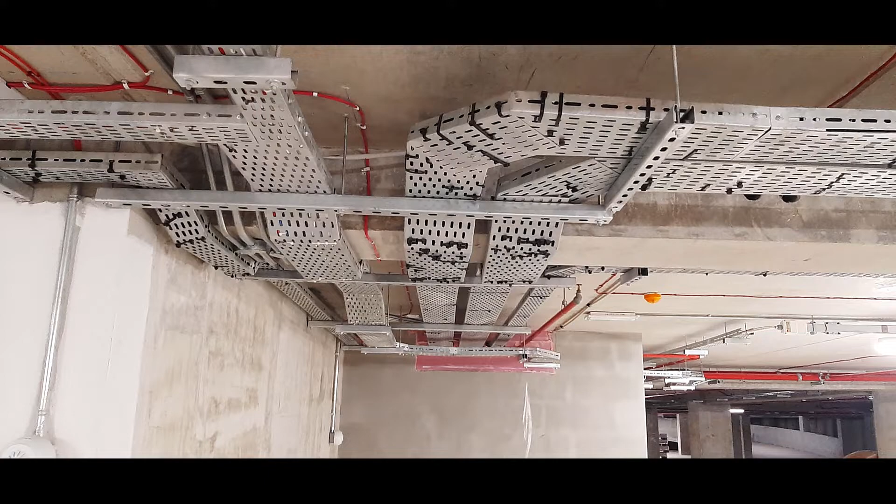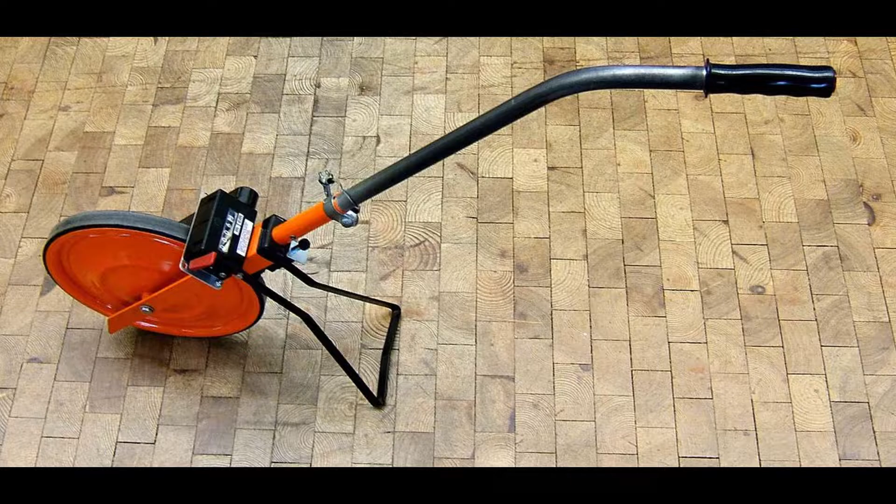Hello everyone, our work today is to measure cable tray here in a car park basement. There are many ways to measure this cable tray with different types of tools. We have measuring tape, measuring wheel, laser, and the long tape. Each of these tools is good in measuring, but it will depend on the thing that you are measuring.

For me, I'm using measuring tape and the measuring wheel, which are the only ones available on our site. Even if you have just a measuring tape, I think measuring tape will do. The most important thing is you manage to measure on site and you measure it correctly.

Another thing to consider on measuring on site is the offset. You can see in the picture that this is the offset, and sometimes we measure only in the drawings, and we cannot see in the drawings the offsets. That's why we have to consider the offset also.

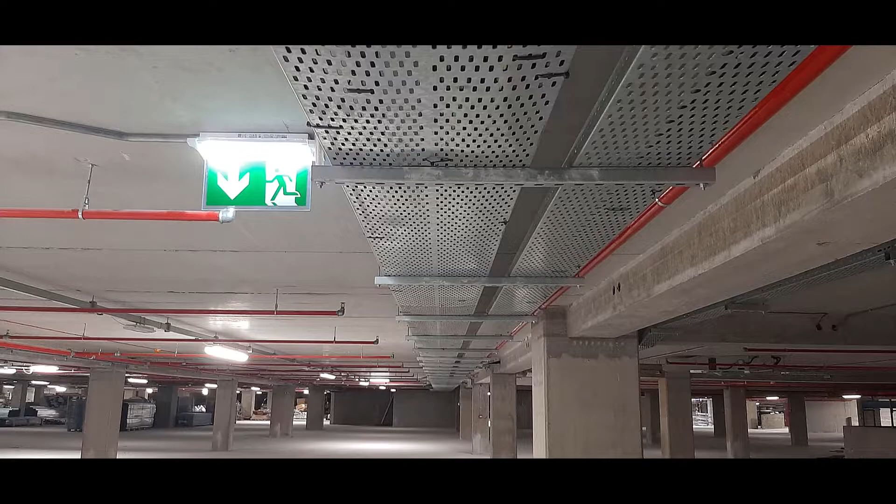About accuracy in measuring on site, we don't need to perfectly measure to 1 millimeter or something like that. At least, for me, I consider not more than 10 centimeters longer, and as long as you are not lesser than the actual measurement, especially when we are claiming it to our client, we have to put a little bit extra on it so we can earn.

But sometimes the client is very strict in dealing with the measurement. It should be what's on site, that's what you have to claim. That's why in measuring, if you are just measuring without the client or the one who is with you, you can put more extra on it.

But if there is a client, we have to be more accurate on it. If there's no one with you, you can put more extra, and if they complain or realize that, then you have to go again to measure on site. Most of the time I think they know that you are putting extra, and I think they're going to consider it a little bit, as long as it's not too much for them. So there is a consideration at least.

Now I'm done measuring on site together with the markings and highlightings on the drawing, and now I'm going to transfer it to the program I have.

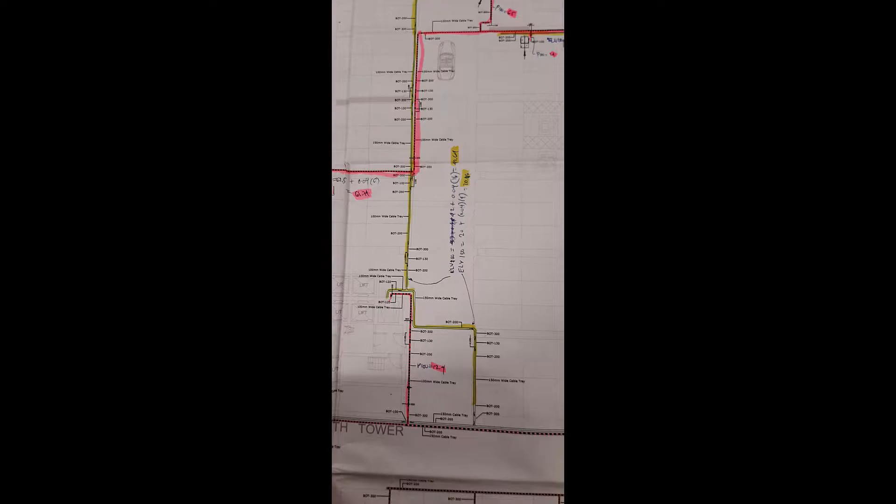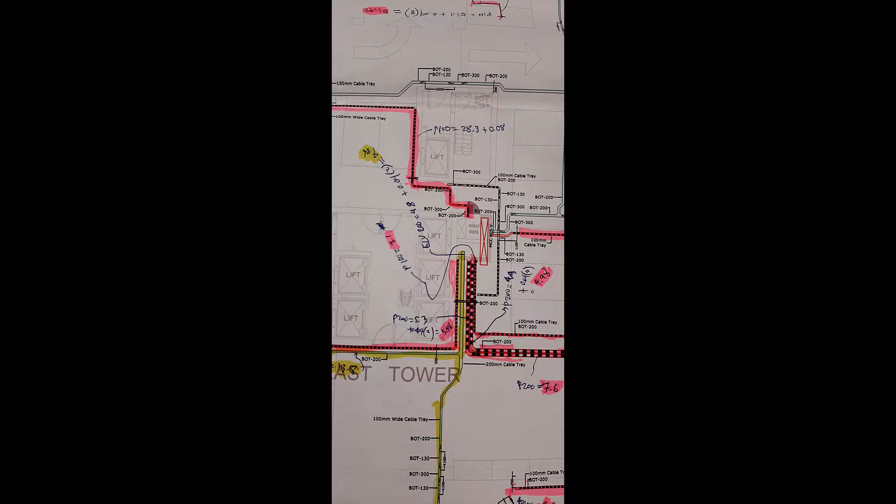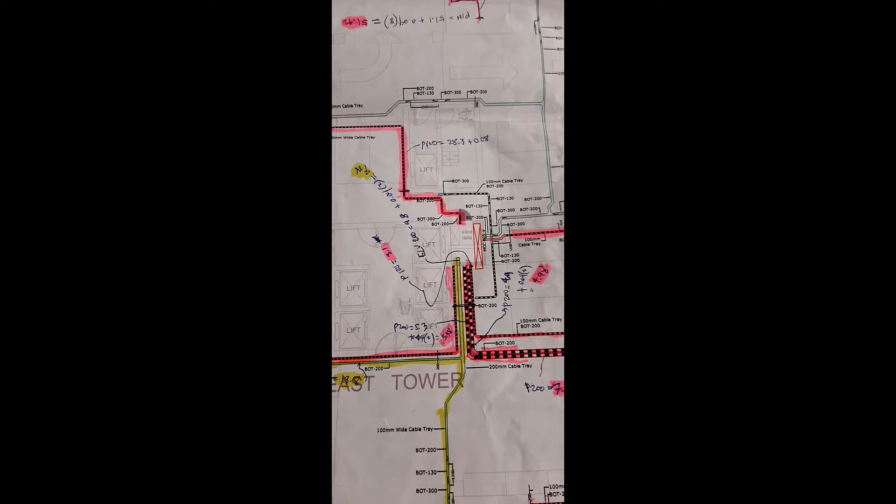Before, when I wasn't using this program, I was just directly going to Excel to input the measurements. But after I learned this program, I don't like to use Excel anymore, except for the bill of quantities to input the quantities. Now I'm going to show you the program and explain to you why I really like it.

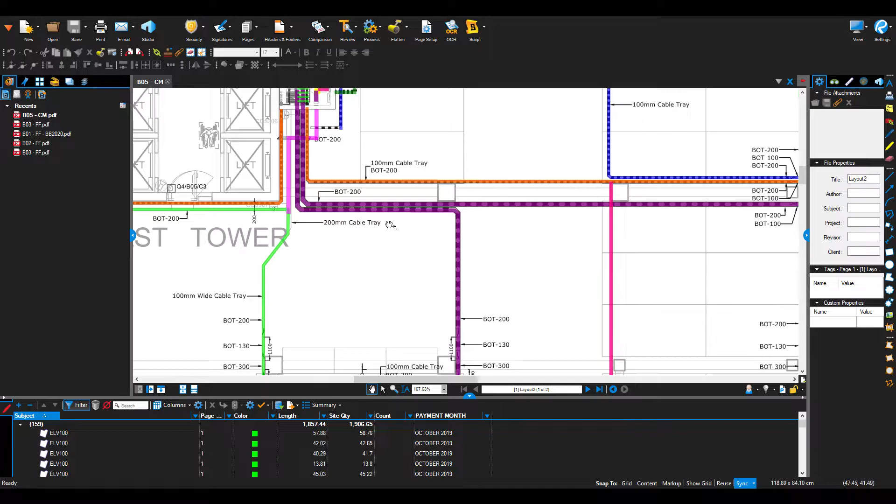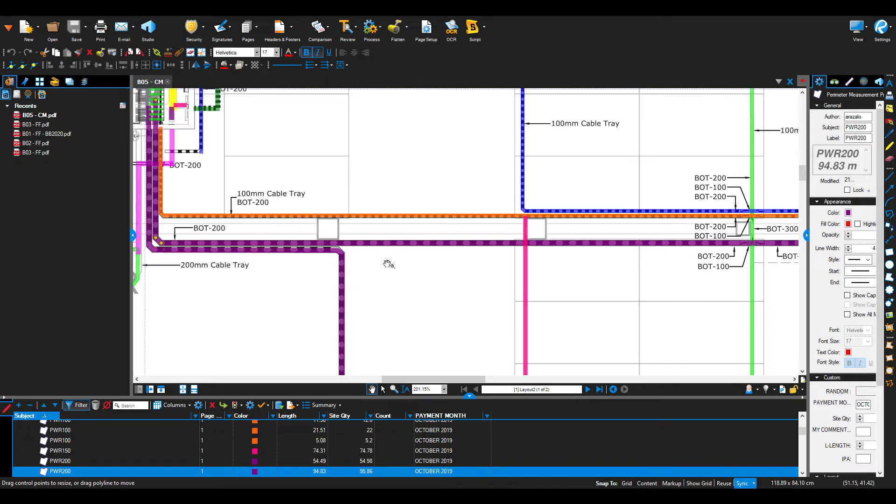After measuring on site, I transferred it here in this program, and I'm going to show you the highlights here. So each of this has a measurement. For example, this one is 95.86. I measured on site, but in the drawing it's 94.83. This is because we have the offset, so we have to consider the offset.

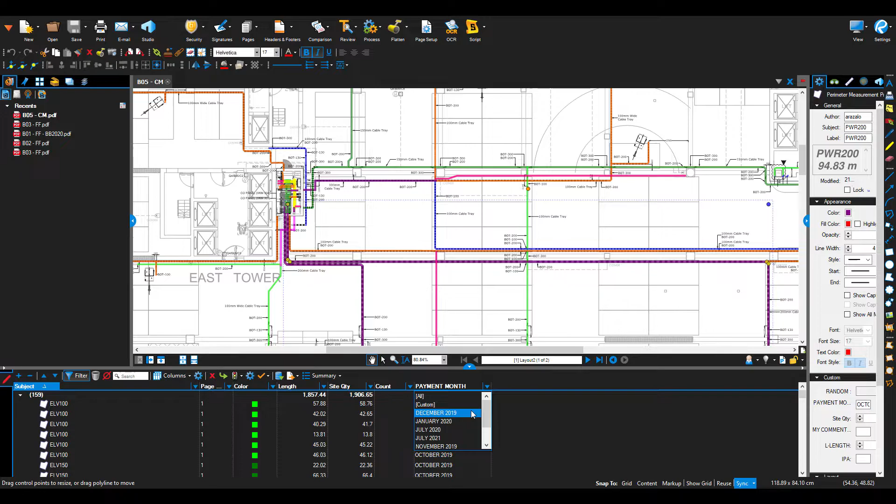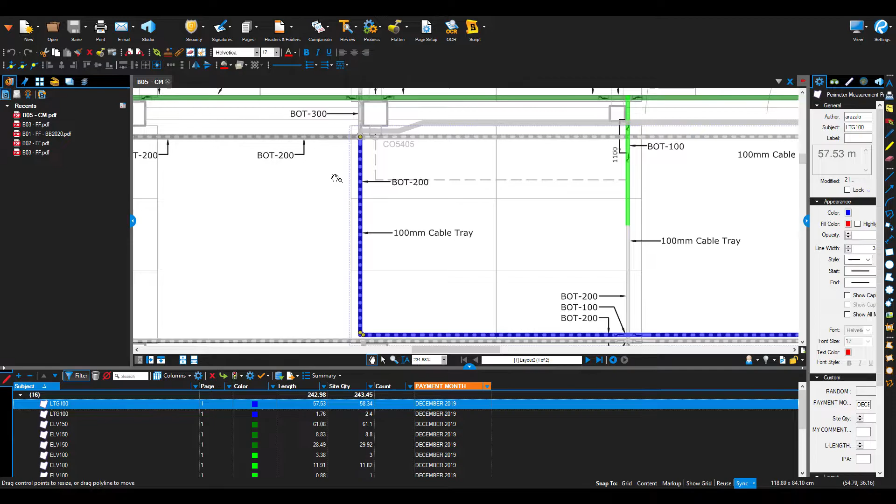Now I'm going to filter it. I'm going to show you the nice program. I'm going to filter it from the very beginning, December 2019. This is the progress of December 2019. So it filtered for December 2019, and this is the lighting cable tray and the size is 100. So this is the cable tray 100 size, and until here only. So this length is 58.34.

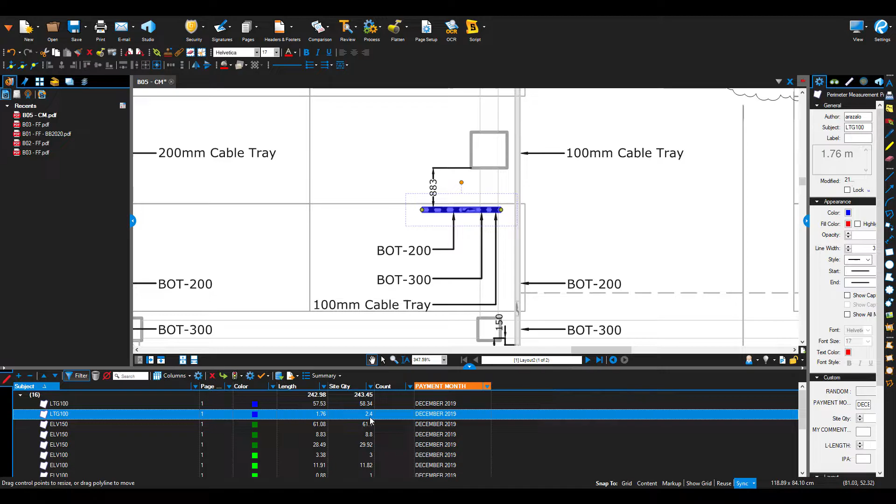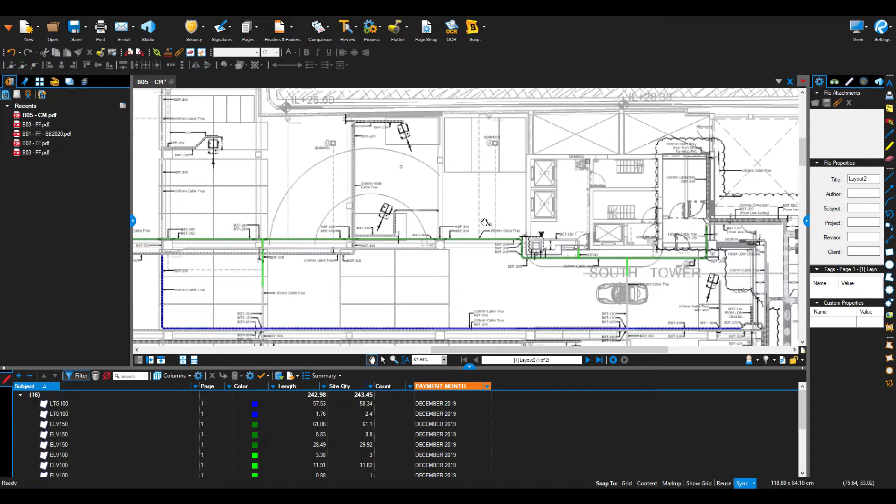Another lighting cable tray is this one, 2.4. This has an offset. As you can see, this is an offset, as you can see also on the side. And for extra low voltage cable tray, if you click it here, it will highlight in the drawing, or if you click it here, it will highlight in this area. So this is 150mm cable tray for extra low voltage, measured at 61.1.

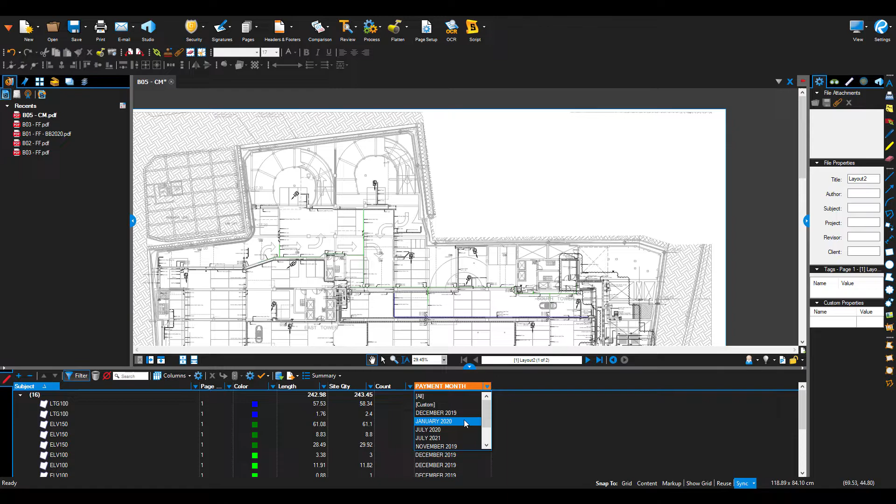Now let's go to next month. After December we have January. So let's see what is the progress on January. We can control-Alt to see. Alright, here. This is the progress in January. Oh, I forgot.

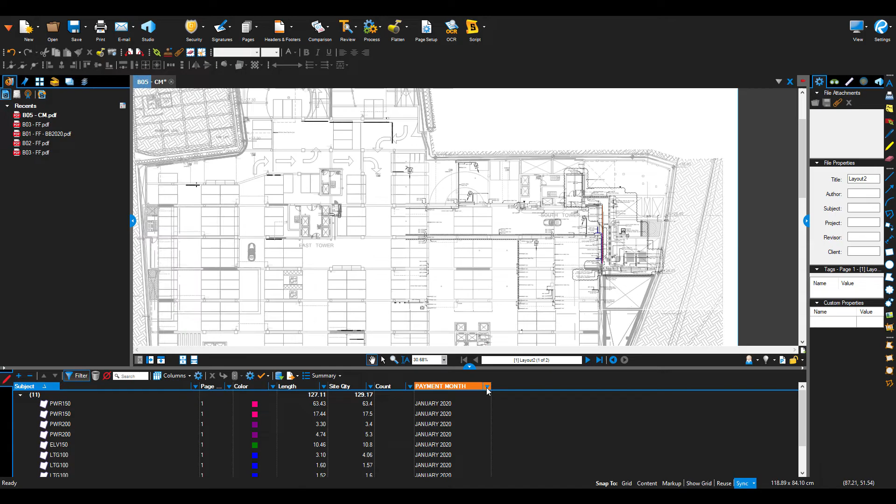We should lock this highlight so we cannot accidentally move it. So here we have January, and after January we have July. So this is the progress in July.

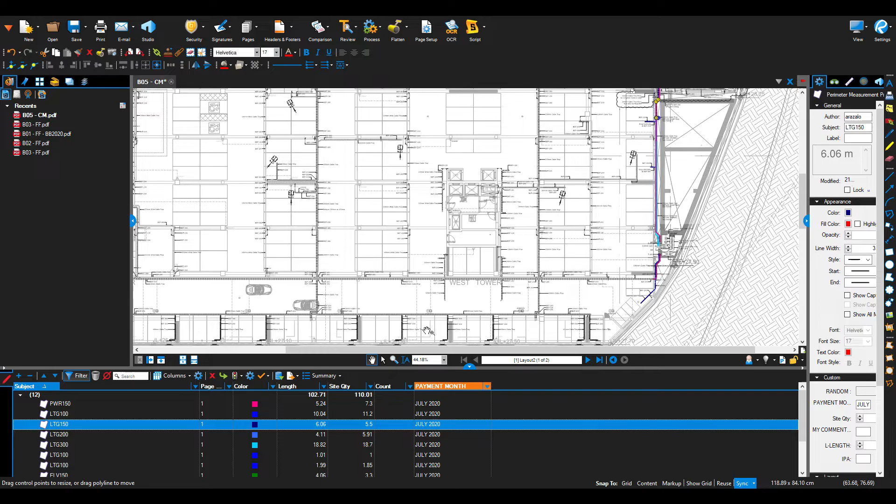This is the one thing I like about this program. You can highlight it, and everything is very detailed, as you can see. If you compare without this program, and you just use the highlighting and input it in Excel, you cannot remember anymore which area, except I think you can still remember by the drawing you have, but the drawing doesn't last forever. It will fade away, or you will misplace it.

But it's still working without this program. I got used to this, I'm using this for 4 years already, and I cannot work without this. So that's why I really like it, this one.